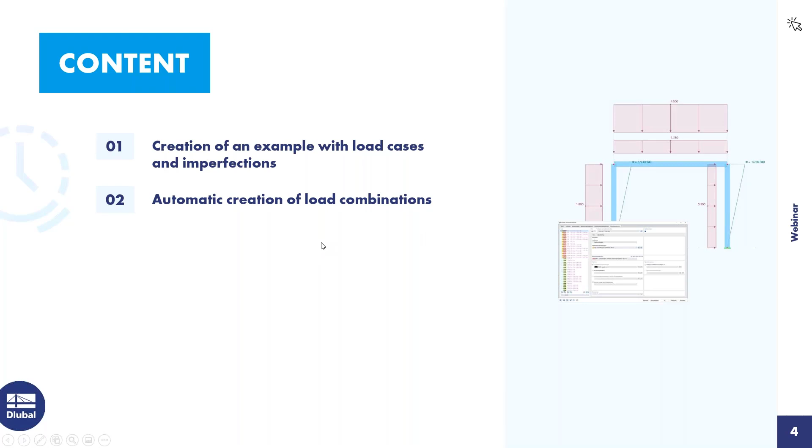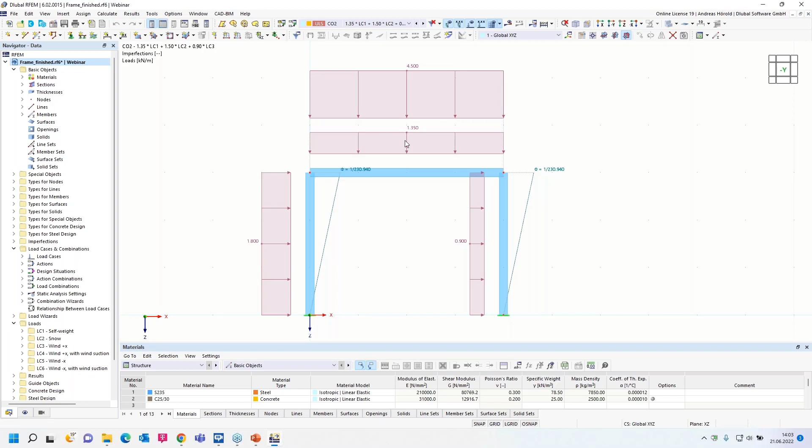Let's turn to the program. That's the finished model, but to show you all options in all dialogues, I will start with a new model. Here, left above: File, New. I call it Frame. 3D model is okay.

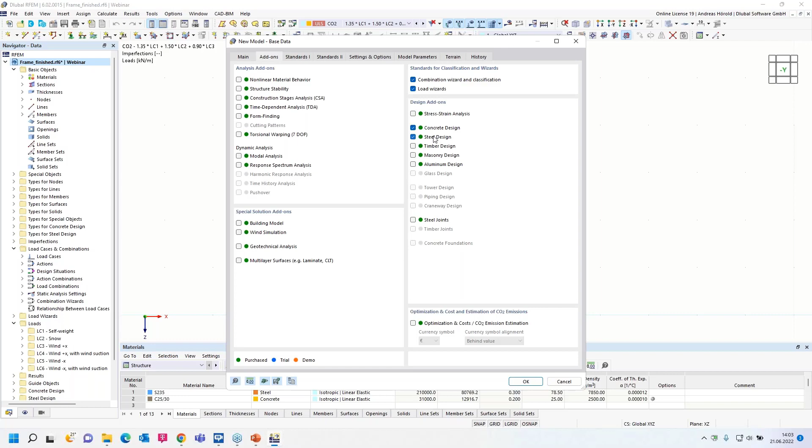Then it's important to check here combination wizard and classification, so that the load combinations are created automatically by the program. Load wizards for snow and wind - we don't use it for the steel frame, so I can leave the check here. I activate two design add-ons to show you where you can assign the design add-ons in the load cases and combinations dialog. So then Standards: there are a lot of standards implemented for the load case classification.

and the combination wizard. I use Eurocode 0, and we are here in Germany, so I use the German National Annex, but as you can see, almost all national annexes from the European countries are included. We don't use any load wizard, but you have also a lot of standards implemented here.

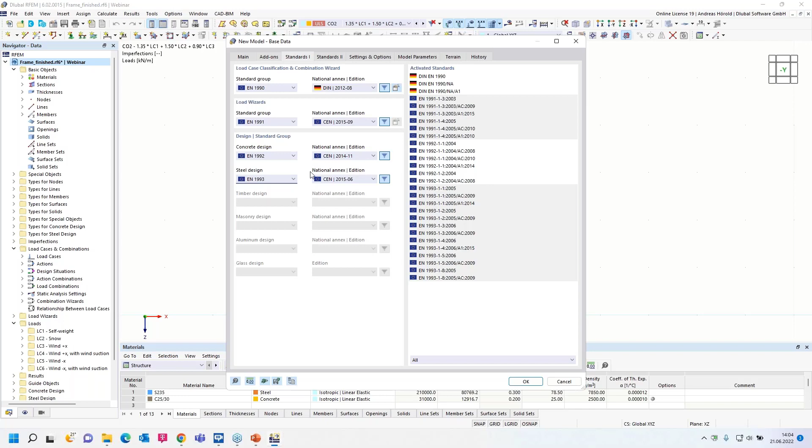Just a moment, I have to mute my colleague. Okay. Then the design standard groups for concrete and steel - but since we don't do a design, I can leave the standard setting.

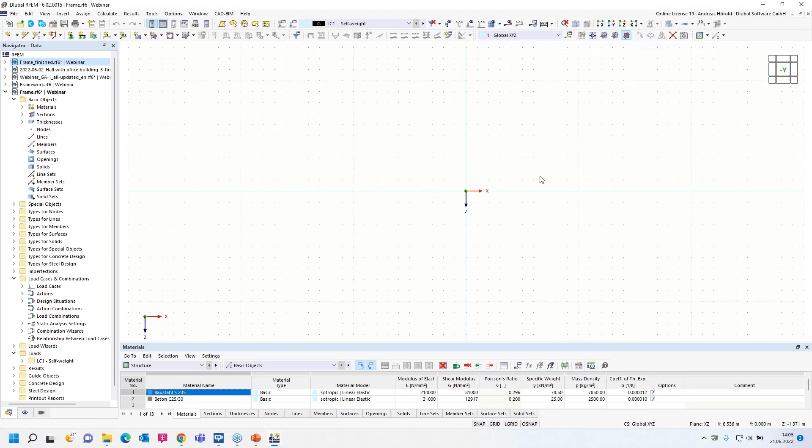Okay, then that's the new model. Here right above, I change the view in reverse Y direction and change the plane to XZ. So I zoom in a little bit and start with the first member here, left above, with a beam section.

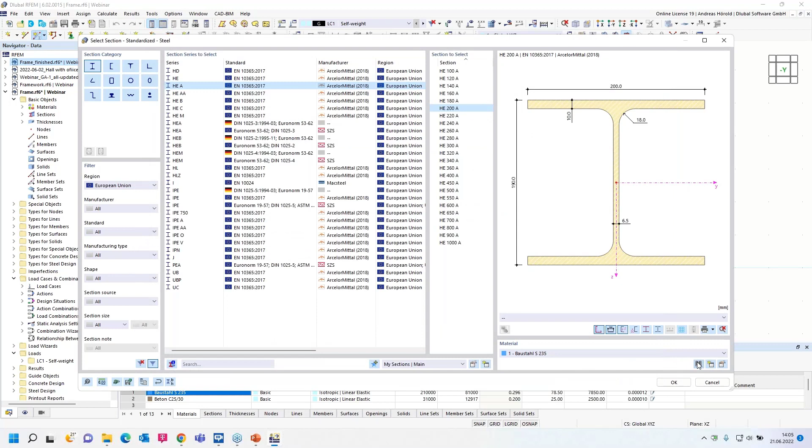I use a section from the database, I-beam standardized, HEA 200, and just a moment, I take a steel grade S235, okay, and leave the dialog. The column should be 3 meters high.

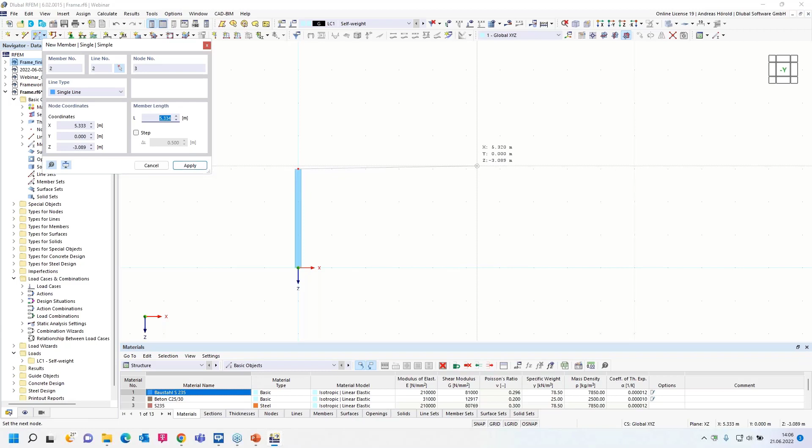Then the horizontal beam, 4 meters in X direction. Then I add a nodal support here left above - nodal support - and I use a fixed nodal support.

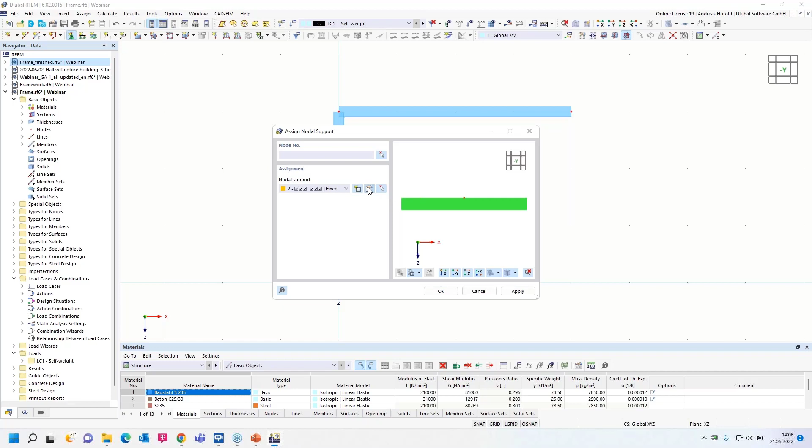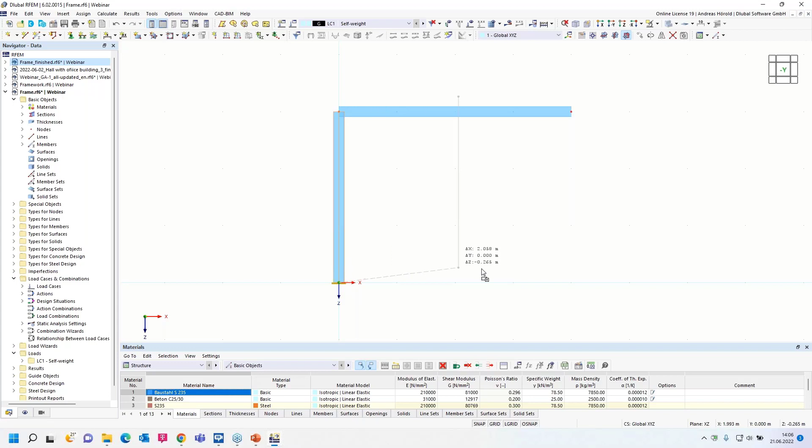Okay, we can take a look at the settings. Yeah, fixed in all directions. Also the rotational, all directions are fixed. Okay, then I add it here, and then with pressing the Control key, I can copy that via drag and drop to the other side. Now the frame is finished.

As you can see above, the self-weight load case is automatically created. We can add a member load for the self-weight load case, 1 kilonewton per meter. Okay, then I create a new load case with this button here, new load case, and I call it snow.

I assign an action category according to Eurocode 0, in this case snow ice loads with a height under 1000 meters. So I add the next load, a uniform load, 3 kilonewton per meter.

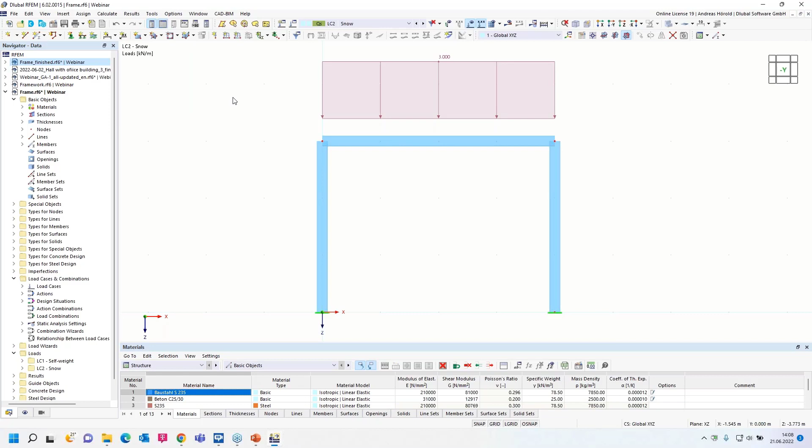Okay, then the next load case, wind plus X, and I assign the action category wind. Member load again, this time in X direction, 2 kilonewton per meter.

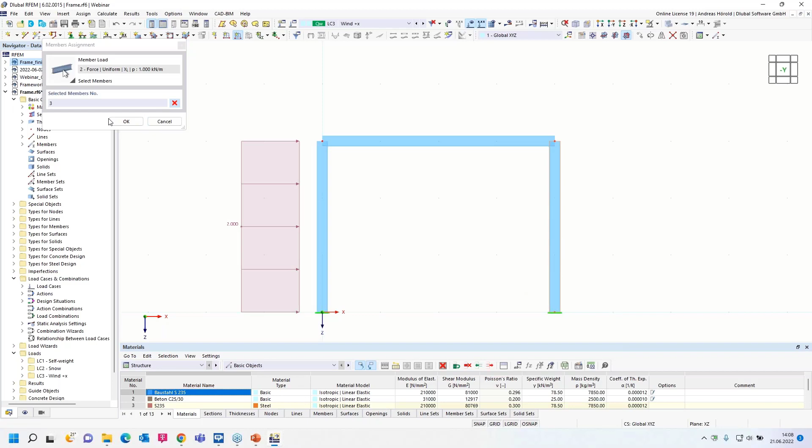Okay, I can reach the dialog with the Enter key. Again in X direction, 1 kilonewton per meter. Okay, load case 3 is finished.

And now I open the dialog load cases and combinations in the navigator data by right click. Okay, load cases - I will come back to that dialog later. So now there are different options: you can create here, left at the bottom, create new load case, then copy selected load case, and the other option is add loads to new or existing load case.

I use the option copy selected load case, so I rename it and call it 'wind suction'.

Okay, all loads are copied. You can see that we are in load case 4. I add the load on the horizontal beam, minus 0.5 kilonewton per meter.

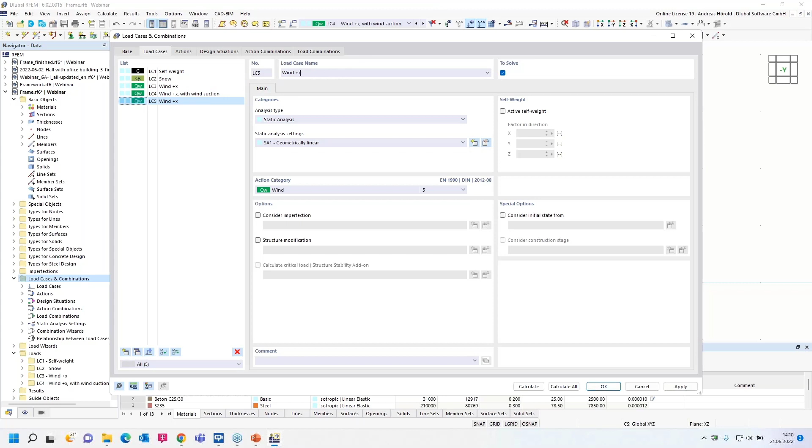Okay, also this load case is finished. Then the same workflow: I copy wind load case 3 again and call it minus X, or rename it minus X. With double click, I come to the dialog edit member load and change it to -1 kilonewton per meter, and this one to -2.

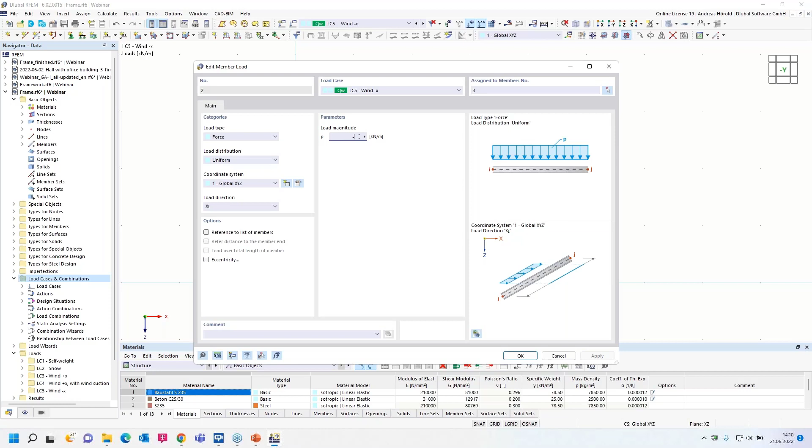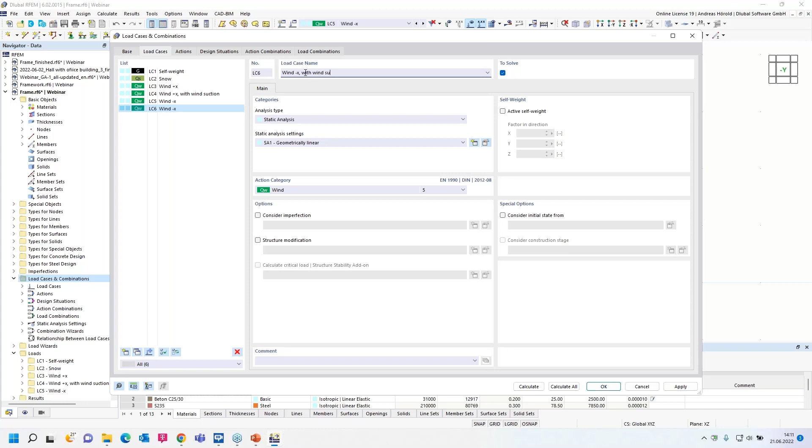Okay, load case 5 is finished, and the same workflow for the last load case. I add with wind suction. Okay, and add the load on the horizontal beam. So all loads are created.

New in RFEM 6 and RSTAB 9 is that you don't have to create imperfections as load cases. In RFEM 6 and RSTAB 9, you have to create imperfection cases and then local imperfections. I will show you the workflow.

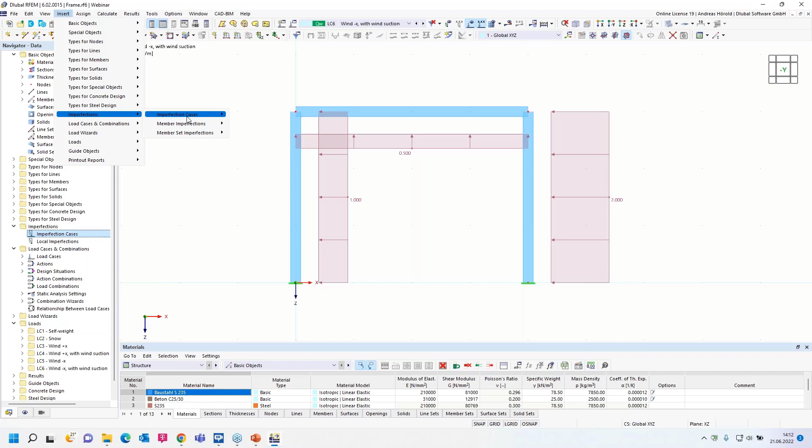I could reach the dialog by right-click here in the navigator data, new imperfection case. The other way is to use the menu above: insert, imperfections, imperfection cases. So first imperfection case, imp plus X. In this dialog, I have to assign the right load cases that act together with the imperfection in plus X direction. That is load case 3 and load case 4.

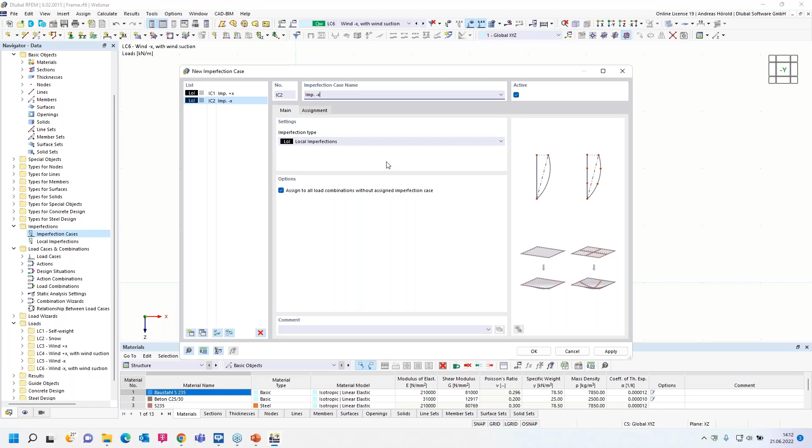Okay. Then, I left at the bottom here, I create a new imperfection case, imp minus X. Okay, and assign load case 5 and load case 6 to this imperfection case.

I leave the dialog and then I can create a new imperfection, a member imperfection, right click, new member imperfection. I assign an initial sway on the columns according to Eurocode 2 and 3. Okay, that's also okay. Then I measure the height of the columns, 3 meters.

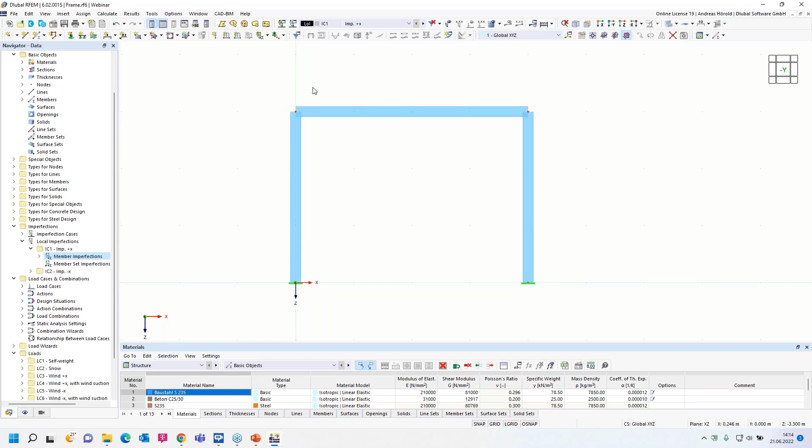Then 2 is the number of columns in one row. Yeah, and that's all. And I have to assign the right imperfection case. Okay, so then I have to select the 2 columns. And here above, I have to show the imperfections. So the first imperfection is created.

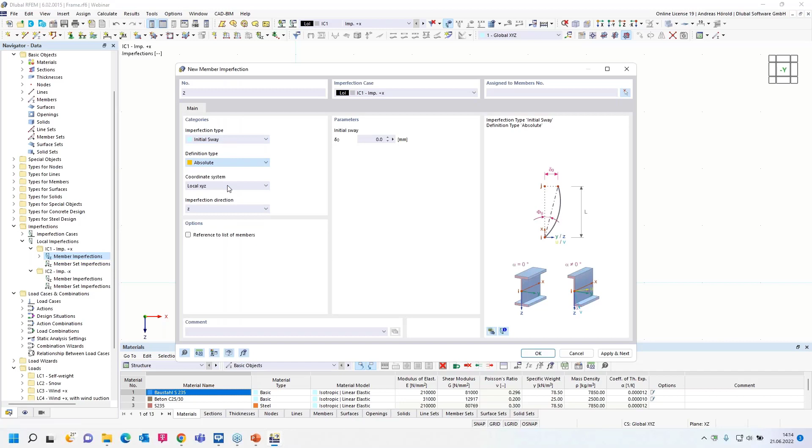Then I can create the imperfection for imperfection case 2. I can do that here in the navigator data again, but I will use the option over insert, imperfections, member imperfections dialog box. Initial sway again, the same definition type in -x direction, 3 meters, and 2 columns in one row.

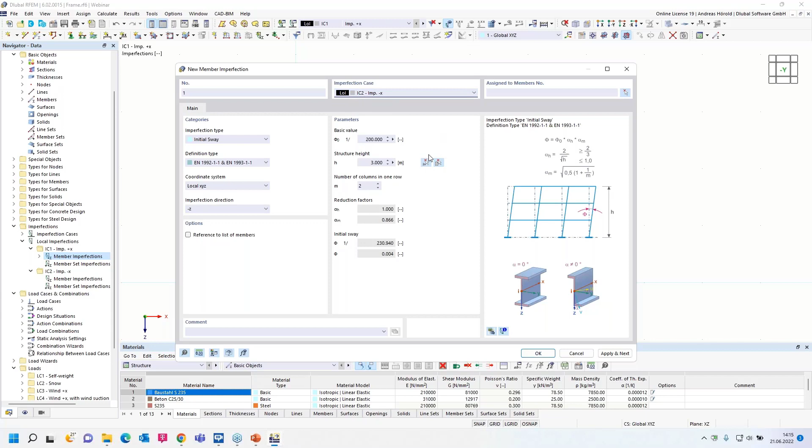So then I have to assign it to imperfection case 2, imp -X. Okay, select the 2 columns again. So this is imperfection case 1 and 2. So that's all for the imperfections.

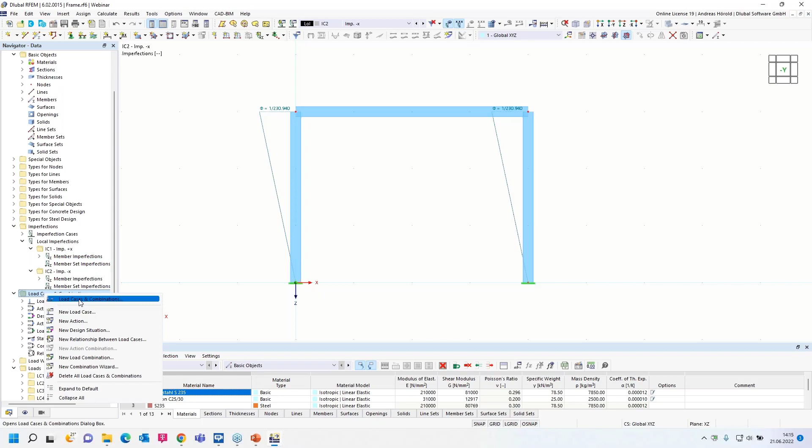Yeah, now all is completed - that means the imperfections and the load cases. And I go back to the dialog, load cases and combinations. I start with the base dialog. At the beginning, we selected the standard Eurocode 0 and the German national annex, and we already set this check. We use the combination wizard to create combinations automatically according to this standard.

So result combinations - I have to say in RFEM 6 and RSTAB 9, the most unfavorable constellations of load combinations are determined in the design situations. You can see that here. We will come to this dialog later. You don't need to create any load combinations for designs in the add-ons. As I mentioned, we will do that in the design situations.

Generally, load combinations are created for the structural analysis to determine nonlinear effects correctly. Result combinations, however, superimpose the results of load cases or combinations. It is maybe necessary, for example, for dynamic analysis. I will show that in the last example. Then we will use the result combinations and the sub-results.

Okay, then parentheses - for example, if you would do a criterion nesting, you could set combination 1 or combination 2 in brackets. That would be possible. And sub-results make it possible to specify additional combinations that can be used for the design. I will use that option in the last example.

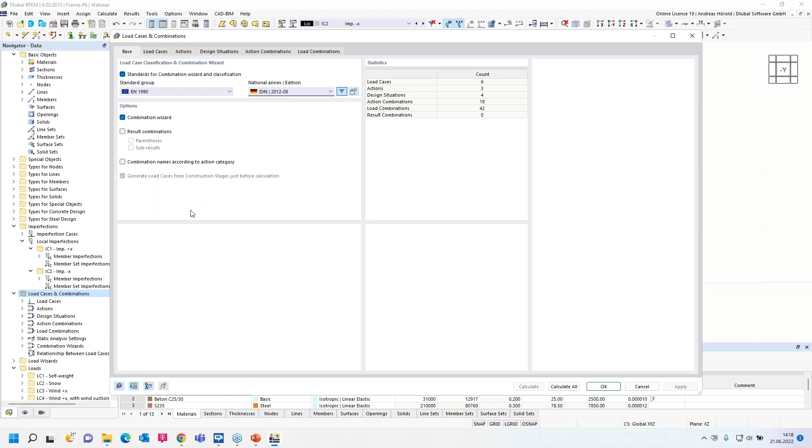So then load cases, we were already in this dialog. Maybe some additional information for the self-weight load case: the structure self-weight is activated by default. You can see that here on the right side.

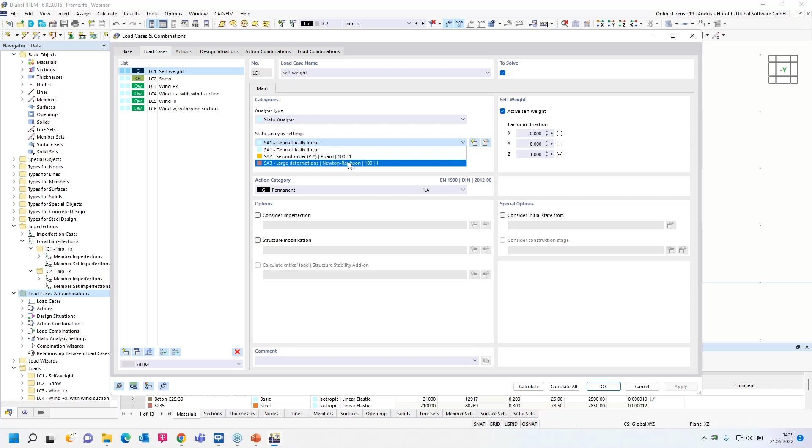The default setting is geometrically linear, but you also have the option to use the second order or the large deformations analysis.

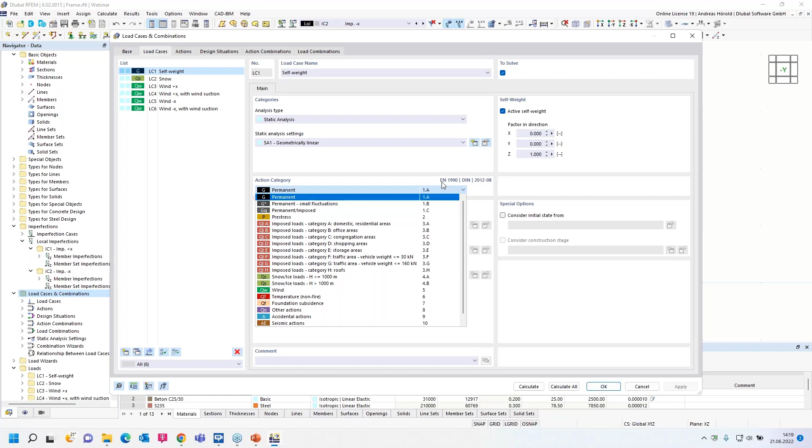The action category, you've already seen that. According to the standard, it controls the superposition of load cases and the partial safety and combination factors, according to the selected standard, in our case Eurocode 0.

Then the wind load cases, the imperfections are considered, as you can see here. Load case 3, wind in the X direction, acts together with the imperfection in plus direction.

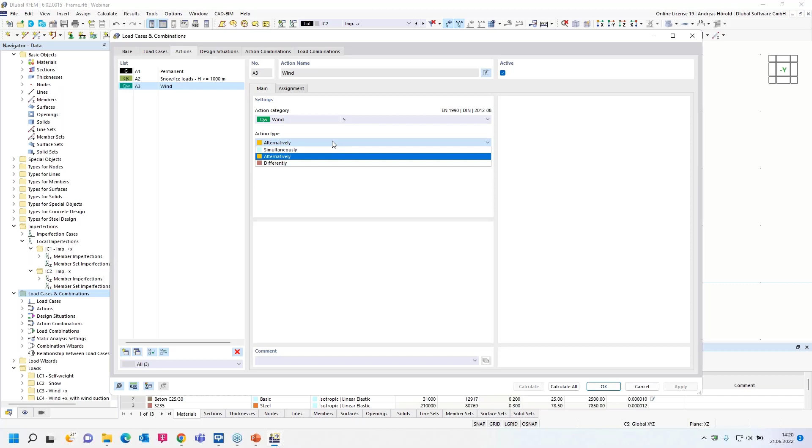So then actions: permanent, snow loads, and the wind loads. Different action types are available. For example, simultaneously, all load cases of the action can be combined as desired.

Alternatively, that's assigned to the wind load cases - only one of the actions or load cases can be effective in the combination. Then we have already the option differently.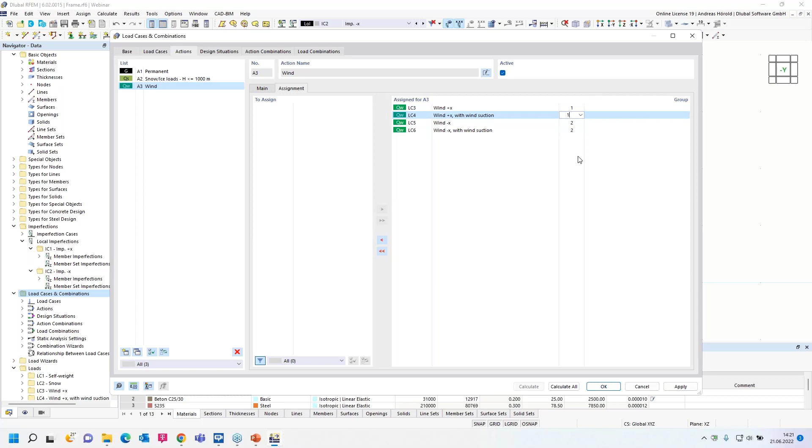Load cases can be assigned to groups. I can show that - for example, I can add here 1, 1, and 2, 2, meaning 2 groups. Load cases act alternatively within one group, and load cases in different groups can occur simultaneously.

So I change it back to alternatively for the wind load cases. That's all for this dialog.

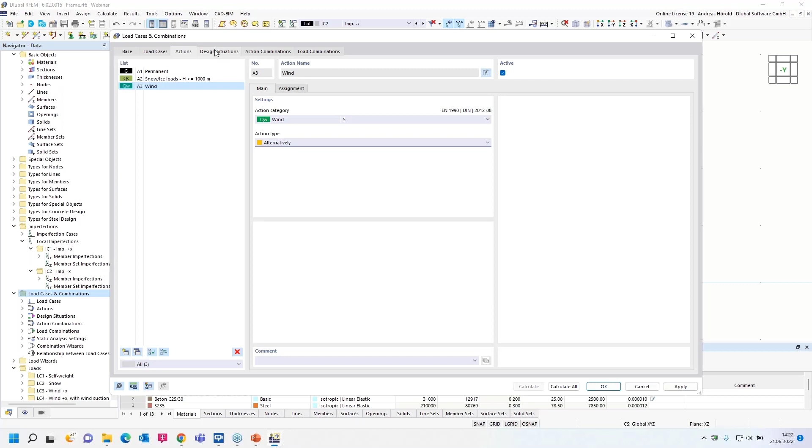Design situations: one for ultimate limit state design, and 3 for the serviceability limit state design are created, and they are assigned to the add-ons - concrete design, steel design. Then the combination wizard, I open the options here.

Load combinations are preset since nonlinear effects and results according to second order analysis are only correctly determined by load combinations.

Then the static analysis settings here for second order analysis - I can go to the dialog here, sub-dialog.

You can, for example, use another iterative method. You can change the number or the maximum number of iterations. If you have a problem that calculation doesn't converge, you can also set the number of load increments higher. So that should be all for this dialog.

Then options 2, user-defined action combinations. No action combination is created when you check this here, but actions must be combined manually.

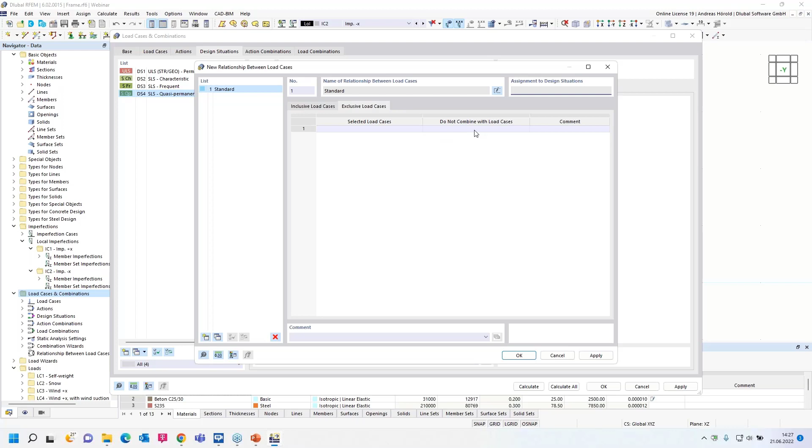So you can select one load case or more load cases and define that it or them only are combined with certain load cases. Or you can exclude load cases - so you select load cases and they don't have to combine with selected load cases.

I don't use that option here.

So then action combinations. As the name suggests, actions are combined now. For example, from action combination 3, we will get 4 load combinations, since there are 4 wind load cases in action category 3.

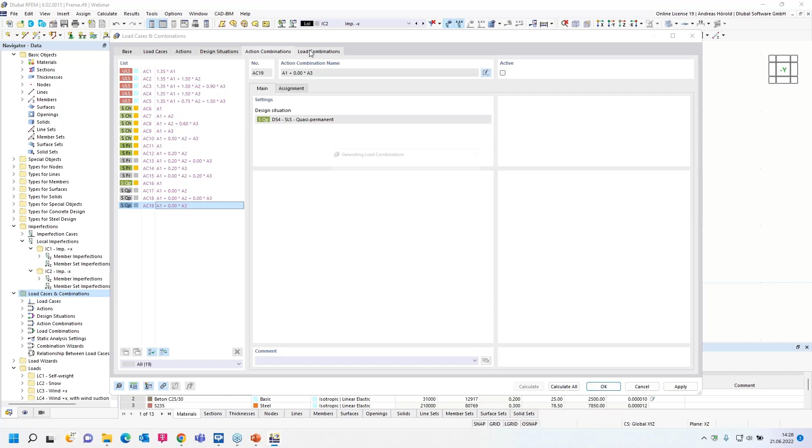Action combinations that are not relevant are set inactive by default. You can see 5 action combinations are inactive. That means we have 19 action combinations minus 5, so 14 action combinations, and we will get 37 combinations: 16 for the ultimate limit state design and the rest for the serviceability limit state design.

Here, left above, with that button, it's possible to create or add combinations manually. Let's take a look again at the design situations. We can click on overview, the assigned load combinations: characteristic, frequent, quasi-permanent. So let's try to reduce the number of generated combinations.

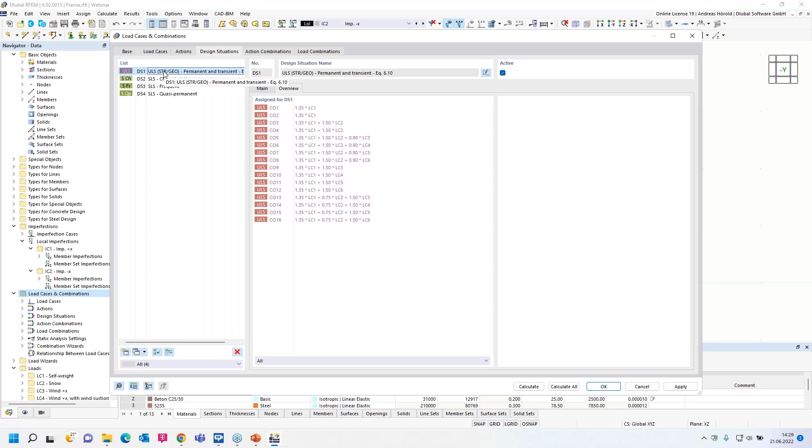We've got 16 load combinations for the ultimate limit state design. I go in the combination wizard and set the check here. Now go to the load combinations. As I said, 6 load cases are calculated at the moment.

And we have got 16 load combinations, no reducing. That can happen, just try it. Sometimes it doesn't reduce the number of combinations, because all the load combinations are important for the calculation. I will try that on another practical example later.

So then I would like to show you the structure modification on this example. Let's calculate combination number 9. That contains only the self-weight and the snow load.

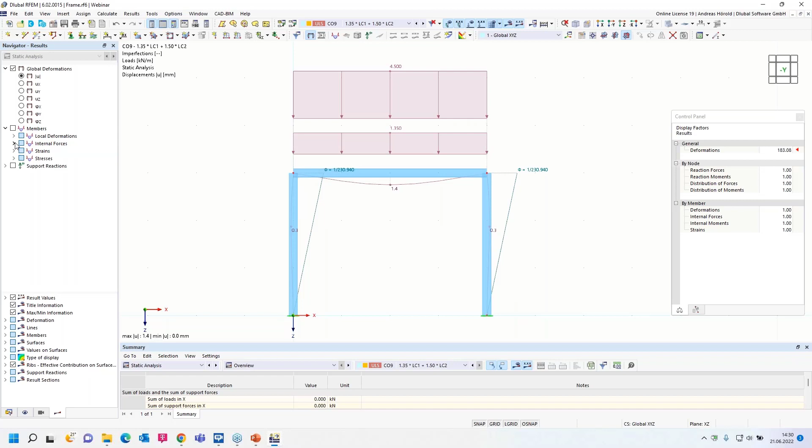I displayed the internal forces, the My. As you can see, the moment curve is quite symmetrical, almost symmetrical because of the imperfection.

And I would like to reduce the stiffness of this column in that load combination. How to do that? I go back in the load cases and combinations dialog, go to load combination 9, and check here structure modification.

And we have to create a structure modification. There are different options. You can modify the stiffnesses of materials, sections, members, nodal supports. You can deactivate objects, members, surfaces, supports, and so on. I would like to reduce the stiffness of a member, so I have to create the member modification here.

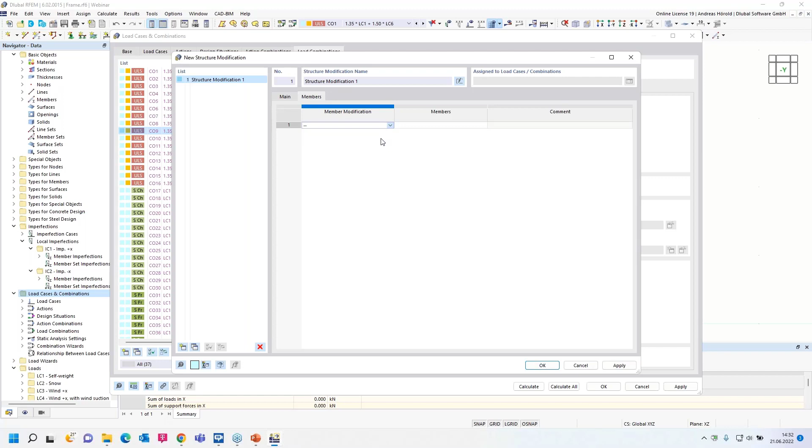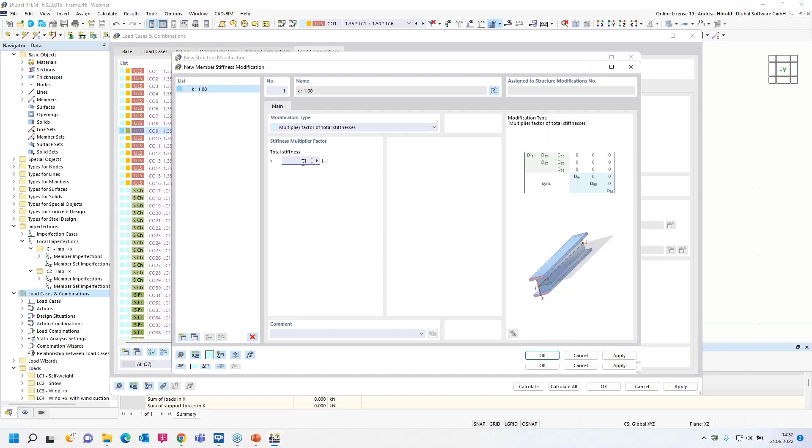New member stiffness modification. I use the modification type multiplier factor of total stiffnesses. You can see here that you have different options for the American standard and Canadian standard and so on. I enter 0.1, meaning the stiffness or total stiffness is only 10% after the modification. I have to select the member, the right column.

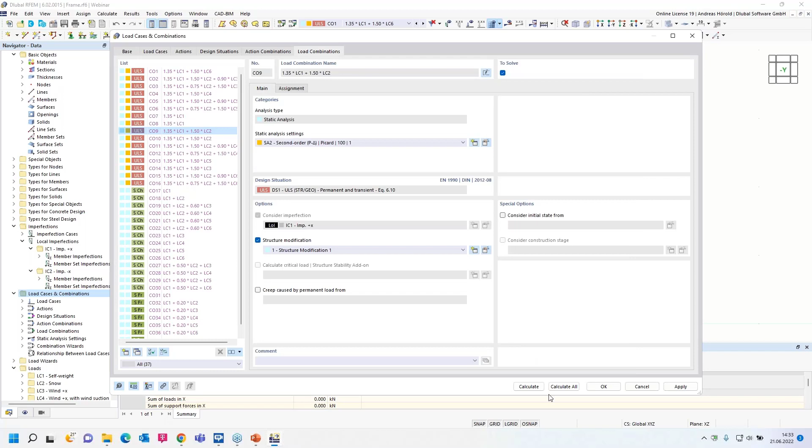Okay, and I can calculate the combination. As you can see, the moment curve isn't symmetrical anymore, because this column has only 10% of the stiffness. Okay, that's all for this example.

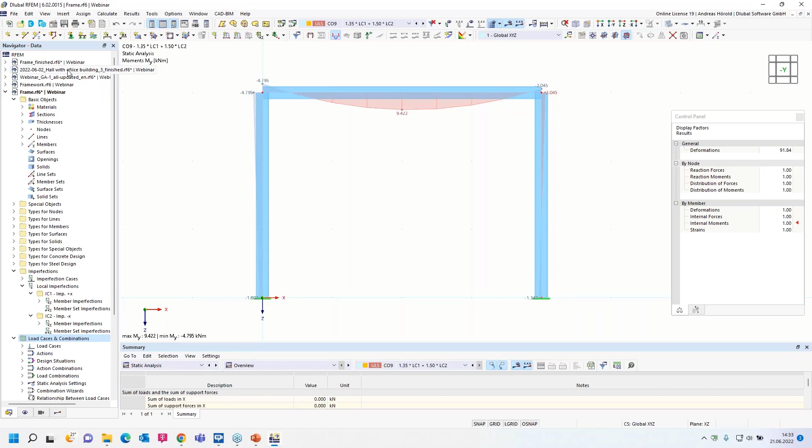I switch to the next example. Now that's a quite practical example. I think I created that and used it for the webinar 3 weeks ago. Let's try the reduction of the combinations, so ultimate limit state design.

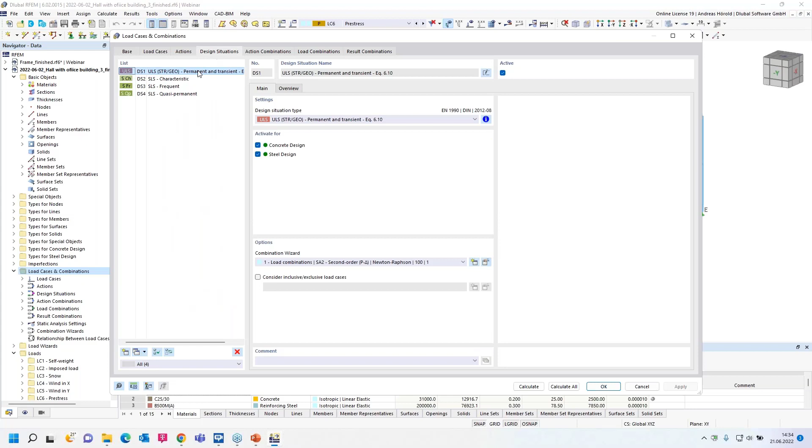Let's take a look at the load combinations. We've got 26 load combinations for the ultimate limit state design. So for this design situation, I go in the combination wizard and check the reduce number of generated combinations.

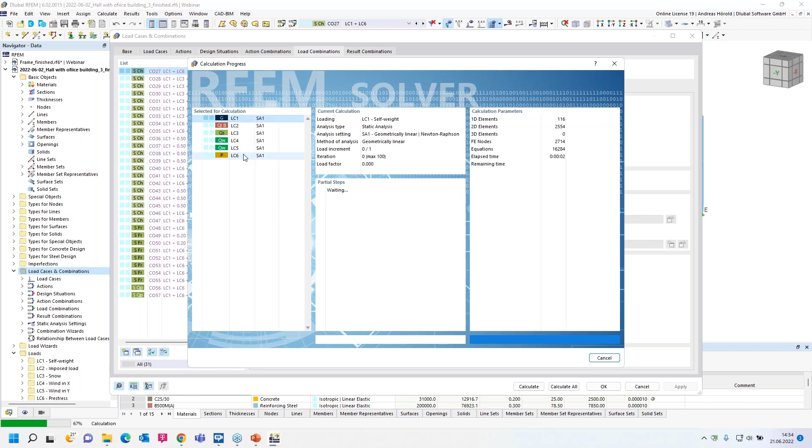So then the same workflow: the 6 load cases are calculated, then the combinations will be created. We've got, or we had, 26, and after the reduction, we have got 10 combinations.

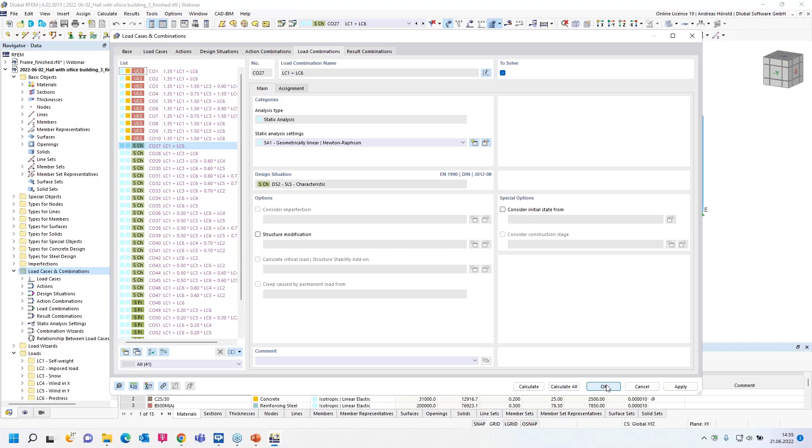Okay, as you could see, sometimes you can reduce the combinations, sometimes not. That depends on your models, on your number of load cases and number of load combinations, etc. Okay, then I can leave the dialog and turn to the next model.

This is also a model from a webinar, the geotechnical analysis. So you can see the model here, a nonlinear solid model with different stiffnesses in various load situations.

And we would like to consider the soil's initial stiffness that is loaded by the self-weight. So before I go in the dialog, I go back in the PowerPoint.

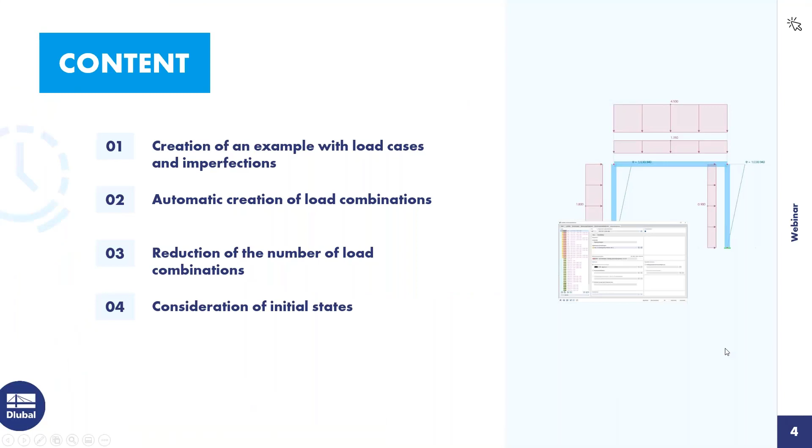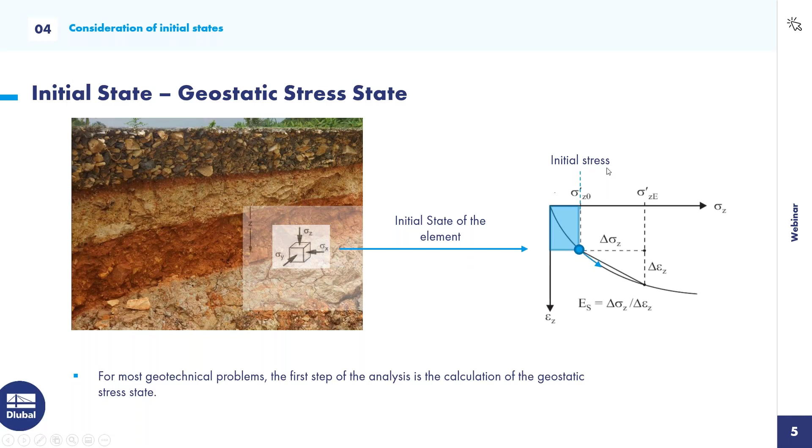Okay, let's go back to the program. We go to the load combinations dialog. So we have different load cases: self-weight of the superstructure, dead load, live load, snow, and the self-weight of the soil. And the self-weight for soil solids is activated. This is this action category.

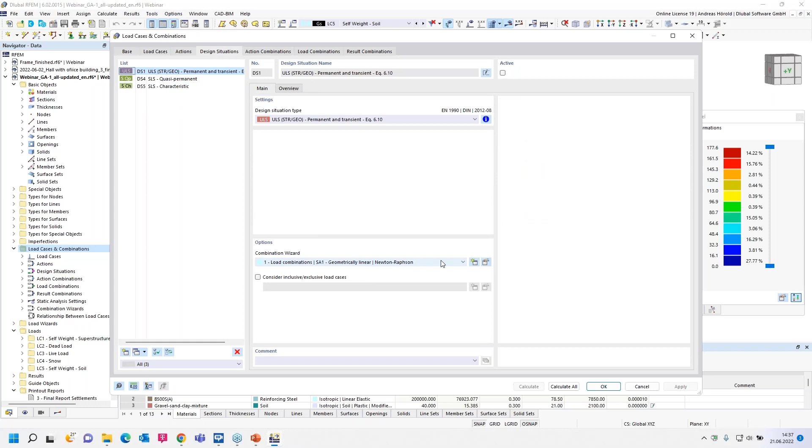It's not necessary to calculate these load cases, only later in the load combinations. So then I showed the combination wizard, and it's checked consider initial state from load case 5, self-weight of the soil. Okay, then we get 2 load combinations.

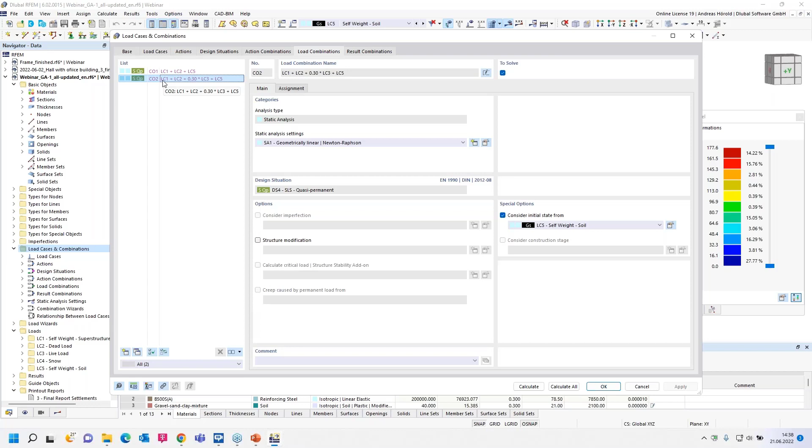And the load combination 2 is decisive. So we created result combinations, one result combination. Load combination 2 minus load case 5 means we subtract load case 5 from combination 2. That won't be necessary in the future. We work on it, but at the moment we solve that with creating a load combination.

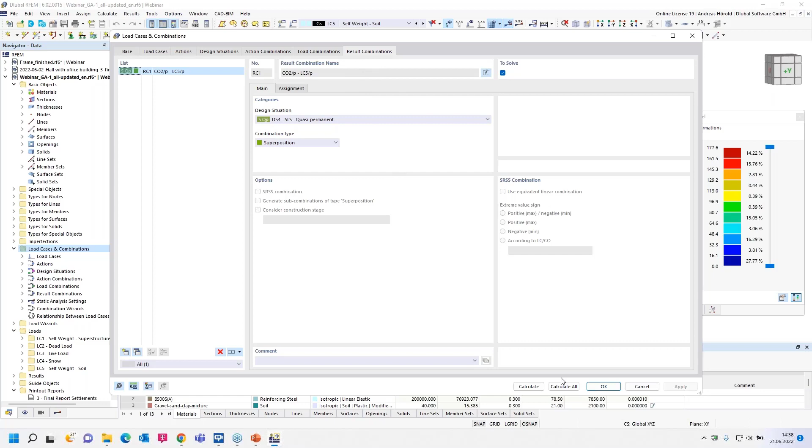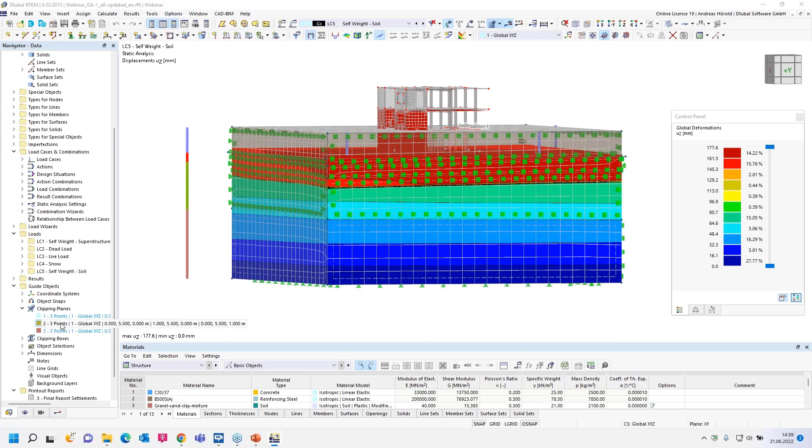Okay, let's take a look at the program or at the graphic. Load case 5, we get global deformation of 177 millimeter. Let's take a look at the clipping plane. I left both, there are clipping planes. I activate this one so I can rotate it.

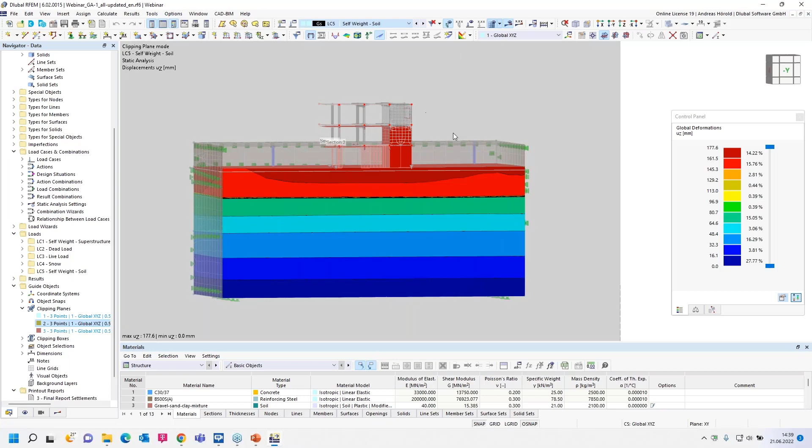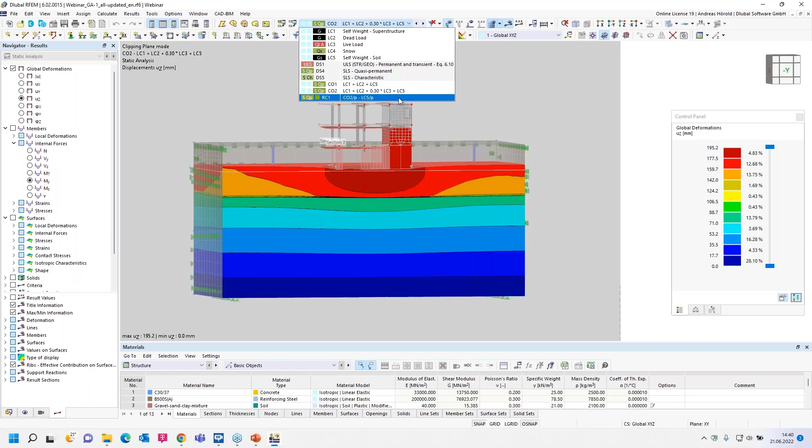As you can see, the building here hasn't any influence for the self-weight of the soil load case, but then in the combination 2, the deformation of the self-weight and the deformation caused by the building is added, and you can see a global deformation of 195 millimeter. Then we subtract the self-weight load case, and now you can see the right deformation under the building, 30 millimeters.

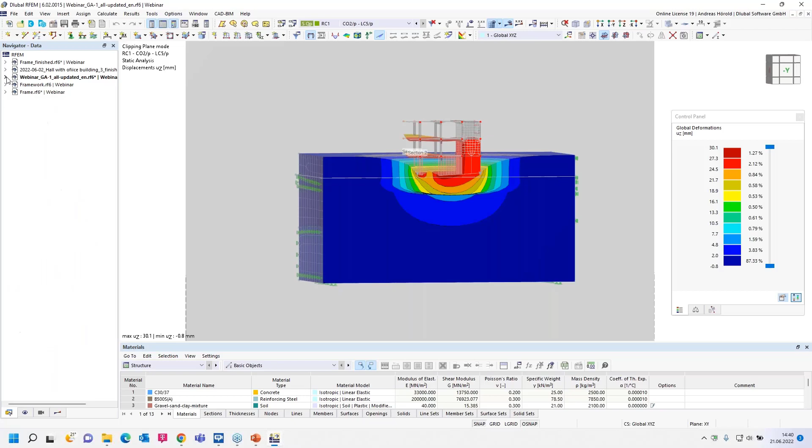Okay, that should be all to the initial state. I turn to the last example for today. I would like to show you a model with result combinations.

I open the dialog here. As you can see, the result combinations are activated, and also the sub-results. Standard for the combination wizard and classification is the Eurocode 0 again, and the German National Annex. So let's turn to the load cases. Load case 6 for modal analysis, and load case 7 contains the results from modal analysis for spectral analysis.

Then the actions. Action 4, seismic action, and load case 7 for the spectral analysis is assigned. So then design situations. Design situation 1 for determination of mass combinations for modal analysis, and design situation 2 for accidental design situation for seismic load in the ultimate limit state. And when you select, for example, or activate the steel design or concrete design, then you need to activate them here for the ultimate limit state design.

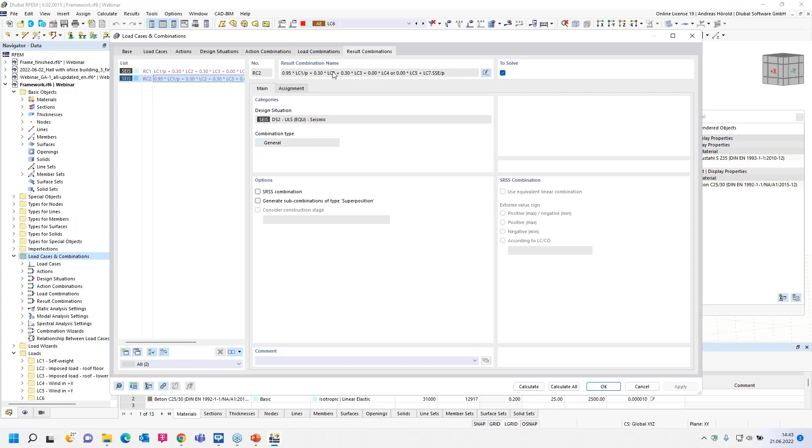So then, the different combination wizards here: design situation 1 for load combinations and design situation 2 for result combinations. Then action combinations. Action combination 1 creates load combinations, and action combinations 2 and 3 create result combinations. So then we have 1 load combination and 2 result combinations. A new feature in RFEM 6 is that the result combinations are automatically created. You can see that.

And what I need to say, at assignment, you can see the selected or assigned load cases, and I activated sub-results, and you have the possibility to superimpose also other partial results here. Okay, that was the example for the result combinations.